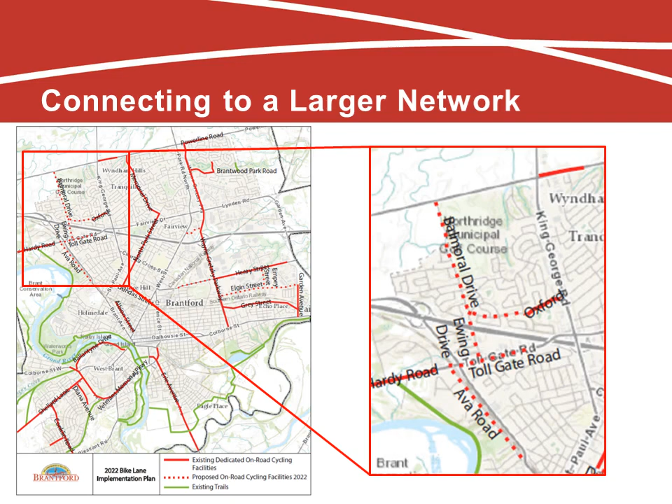Ava Road is identified as a cycling corridor in the city's transportation master plan. The bike lanes will run from Hardy Road to Westmount Boulevard. The proposed changes include 1 bicycle lane and 1 vehicle lane traveling in each direction.

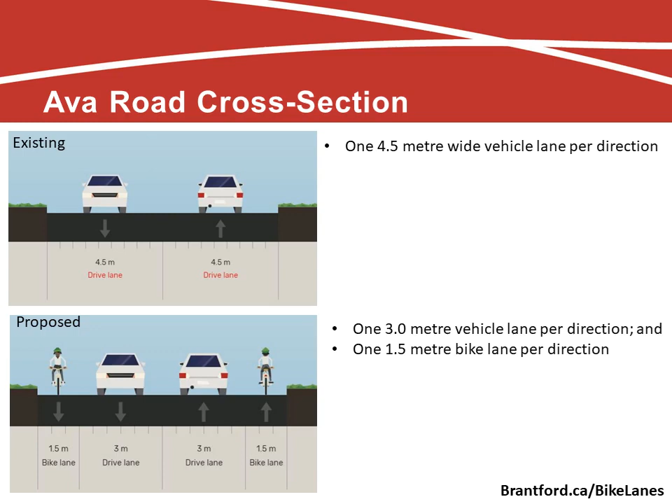Additionally, traffic calming devices called chicanes will be installed along the roadway. We will talk more about these on the next slide. Additional information can be found on the City of Brantford website at brantford.ca/bikelanes.

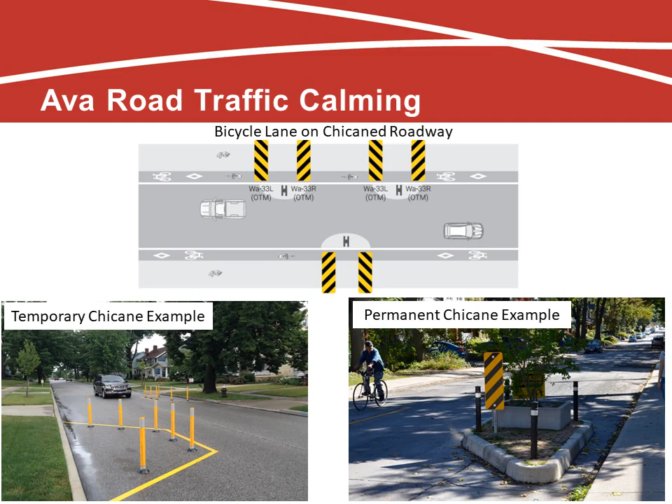A chicane is a form of traffic calming that is comprised of a series of curb extensions on alternate sides of a roadway, which narrows the roadway and requires drivers to steer from one side to the other to travel through the chicane. The purpose of these traffic calming measures is to reduce vehicle speeds on local streets and discourage traffic from using Ava Road as an alternative to Paris.

Balmoral Drive is identified in the city's transportation master plan to be reconfigured to include bicycle lanes. These bike lanes will run from Smith's Lane to Oxford Street, where it will provide a necessary connection to the existing bike lanes on Oxford Street.

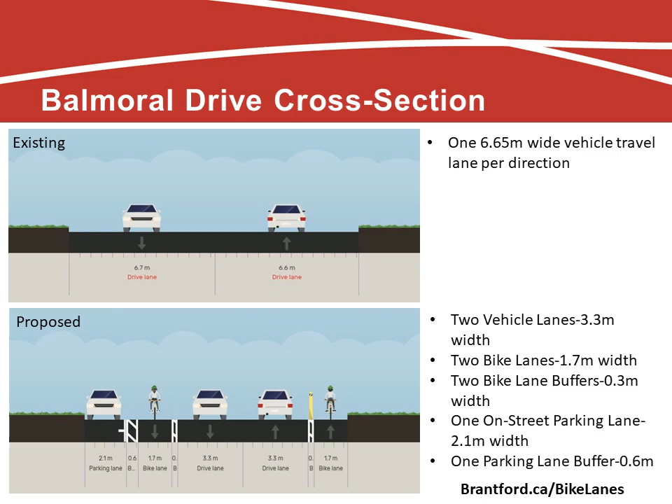The proposed changes include having 1 vehicle lane in each direction, 1 bike lane in each direction, and a parking lane on one side of the road. Buffer lanes are proposed between the vehicle and bike lanes to provide greater separation, and between the bicycle lane and parking lane to eliminate dooring. Additional information can be found on the City of Brantford website at brantford.ca/bikelanes.

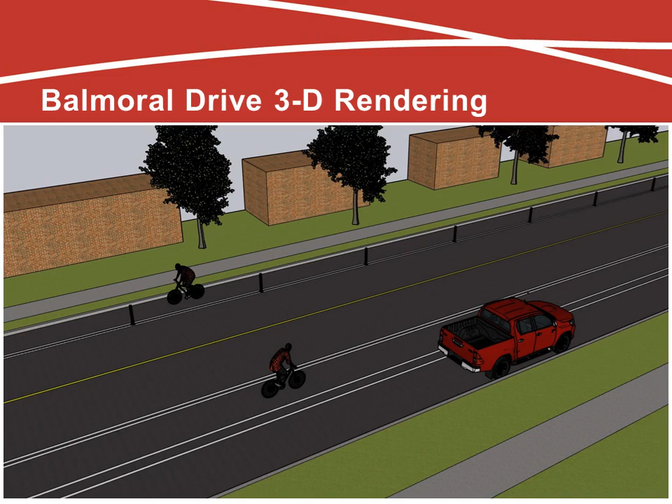This is a 3D rendering of the proposed changes to Balmoral Drive. One thing that is new to the City of Brantford is the physically separated bike lanes. The city is proposing to install flexible bollards between the south/west bike lane to provide further separation from moving vehicles. This can't be done on the north/east side of the roadway since vehicles need to cross the bike lane in order to access the parking lane.

Due to road width restrictions, on-street parking can only be permitted on one side of the roadway. The city conducted a parking study to determine where vehicles park the most along Balmoral Drive, and also determined which side of the roadway would allow us to keep the most amount of parking. After these studies, it was determined that the north/east side of the roadway, or even-numbered addresses, should have the dedicated parking lane, which means that parking will no longer be permitted on the south/west side of the road or odd-numbered addresses.

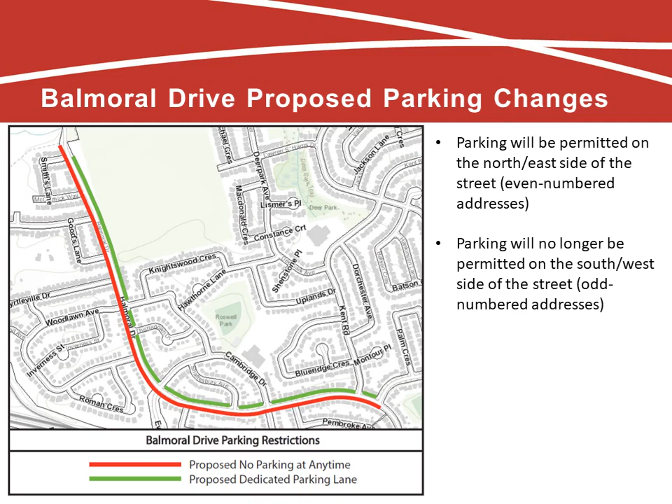Ewing Drive is identified as a cycling route in the city's transportation master plan. These proposed bike lanes will provide a necessary connection to the proposed bike lanes on Balmoral Drive at the north end of the street and the proposed bike lanes on Toll Gate Road at the south end of the street. They will also help encourage active transportation as a viable form of transportation to travel to Coronation School.